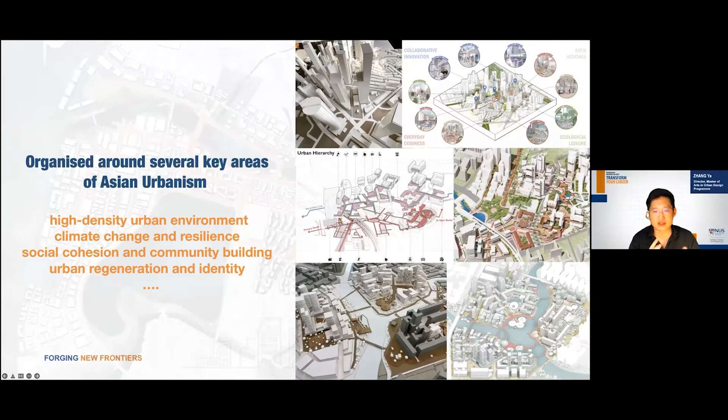In terms of the aim of the program, we aim to cultivate leading urban designers with strategic visions and creative thinking skills in Asia, but beyond. We aim to equip our graduates with cutting-edge knowledge, social responsibility, entrepreneurial spirit, and all other necessary skills, so we can together push forward the urban design profession in this rapidly urbanizing world. These slides share our big vision, why we are here, what we would like to do, and our aims.

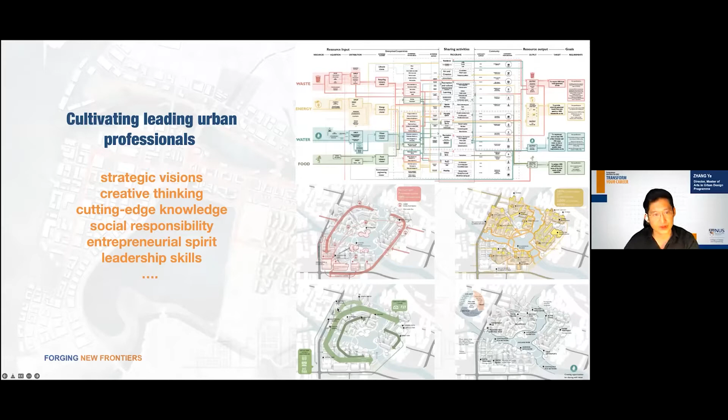In the following parts of this presentation, I will tell you how we are going to achieve this goal, and there are different approaches to it. So firstly, I'd like to highlight the team of our professors.

So our team is drawn from an international cast of experts from both academia and practice to provide all the students with a global perspective and help them become future-ready urban designers to deal with the challenges I just mentioned. It's also notable that Singapore is a regional hub for many multinational design and planning firms, attracting numerous urban professionals from everywhere in the world. This is a very rich pool of resources that we always draw on, engaging different professionals from different backgrounds in different ways to enhance the teaching and learning of this program.

And the next one, why Singapore? Why is Singapore so unique? As you all know, Singapore actually has outstanding achievements in high density urbanism. It's really the birthplace of many innovative urban design ideas that led to the production of high density and high quality urban spaces across many countries in this region and beyond.

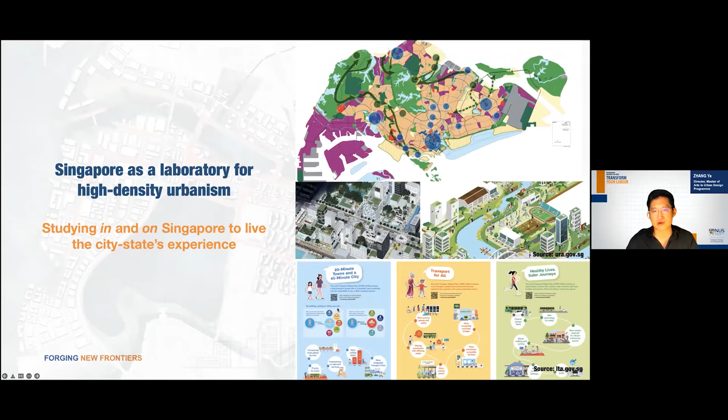So to study in Singapore is actually for all the students to live the country's experiences, to in person witness how it creates new spatial configurations, incorporates natural resources, promotes public engagement, and harnesses smart technology in the recent Smart Nation initiative to achieve successful placemaking. So that's why Singapore provides you with a unique environment for learning, not just about this program, not just about NUS, but the entire country as a whole.

In addition to that, we try to expand the exposure to have broad connections with both practice and government agencies. We engage a lot of friends from different organizations in teaching different modules to deepen our students' learning process and link the academic learning to the real practice, to the real world.

Another important focus of this program is collaborative learning. We know that urban design practice involves collaboration across different knowledge boundaries and professional disciplines. So this program places social and intellectual interdependence at the core of our education. This relates back to our aim of nurturing leadership skills in future urban designers, for them to deal with multi-professional, multidisciplinary collaboration with a strong commitment to creating greater cities in the future.

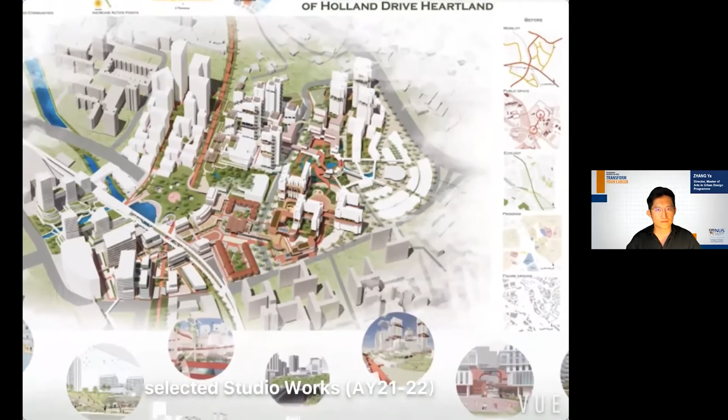All right, thank you very much. That's the part about the overview of the program. I hope the video can give you a more lively understanding about what we do and how we live our life here in this program.

Most of the contents of this video is actually from last year, where we tried to push more engaged learning opportunities despite the pandemic and all the difficulties we had to face together. We'll continue with these efforts in the following parts, in the next academic year and the future. If there are any challenges, we'll work together as a whole team with Jason, Osman, and the other colleagues to deal with that.

Without further ado, I'd like to invite Jason and Osman to share their insights about this program. I would like to ask a few questions related to key points that I mentioned just now in the slides and reflected in the video.

I think one of the key points for this program, for all of us together, is to look at in which ways our teaching and learning can provide new knowledge to address the pressing needs and challenges of Asian urbanism in our studio. So we incorporate the different challenges and problems of the cities into the studio and into other modules of the program.